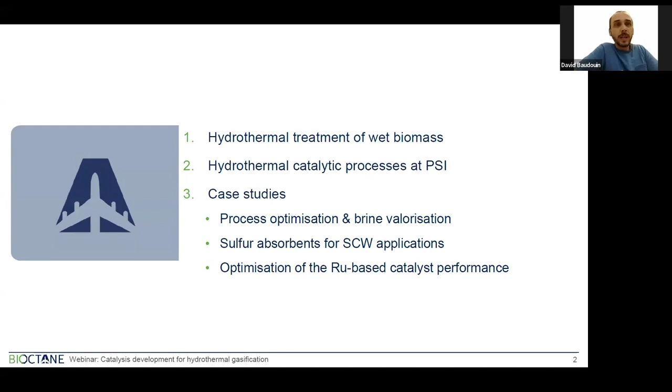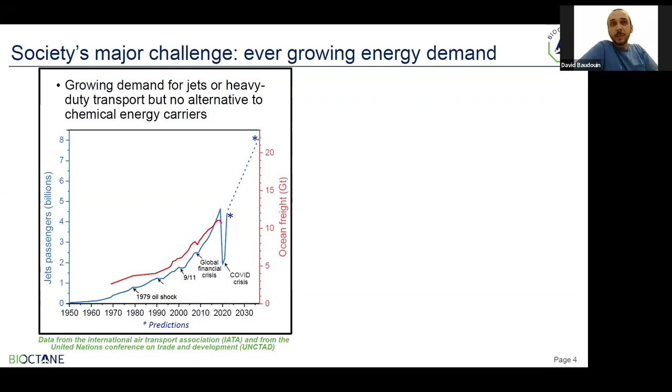You all know that we have a growing demand on jet fuels and heavy-duty transport fuels, also marine and trucks. Despite the COVID crisis, this is expected to keep growing, despite the limitation now in fossil fuel resources and liquid fossil fuel resources.

So the big question is, how are we going to overcome this limitation in liquid fuel resources? If we want to fly, flying with batteries is hardly an option, particularly for long distances.

One alternative, not a solution to everything but one brick in the bridge we have to build, is to use these huge amounts of wet biomass, wet wastes that are available and underused. The big problem to overcome is the low efficiency when one wants to burn biomass that contains water. Obviously efficiency goes down as the water amount increases, and when you reach about 60 to 70% water, typically you waste all the energy contained in the feedstock to evaporate the water.

Taking as an example one very good case of wet biomass that's available and underused nowadays is sewage sludge. Here is a typical best-case scenario of usage: after some pre-screening, separation and sedimentation, you would apply anaerobic digestion to produce biogas from the sewage sludge, and the digestate produced would then be dehydrated in order to be, for instance, incinerated or used in landfills when that's available and possible.

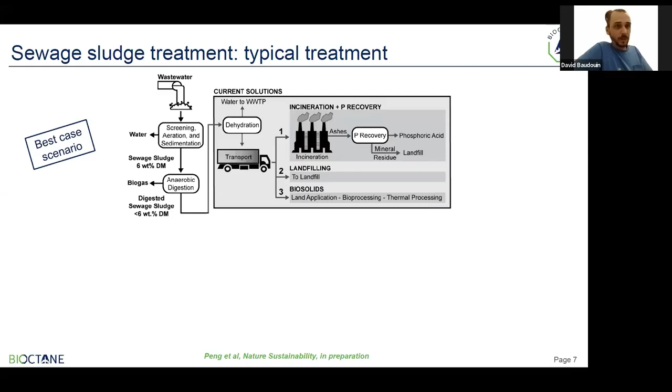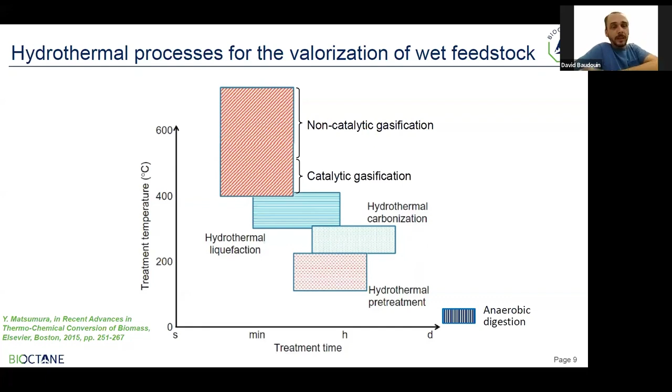So when we apply, for instance, hydrothermal gasification to a sewage sludge treatment plant, there are two approaches: either you perform gasification from the raw sewage sludge before it's treated in the wastewater treatment plant, or it can also be applied on the digestate itself to further convert the organics present in that stream.

The very big advantage of this, which I will explain in a few minutes, is that hydrothermal gasification particularly allows, on one side, production of gas, biogas, and on the other side, it allows the recovery of phosphorus and other nutrients.

One thing to outline is that in Switzerland, for instance, by 2026, most of the phosphorus should be recovered from sewage sludge, and this brings some challenges for wastewater treatment plants in the country. Other countries are following, like Germany.

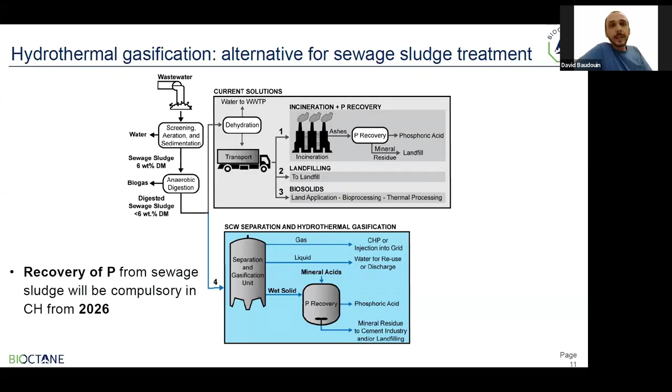This, of course, can bring a lot of trouble, as these salts, if they precipitate on the walls of a continuous process, can clog the process, but they could also deposit on catalysts, which would also lead to trouble in a catalytic step of a process.

This would be the case for some salts, not all of them, fortunately. Examples would be sulfates, potassium or sodium sulfates, sodium carbonate, and sodium phosphate also. These salts precipitate and are classified as type 2 salts.

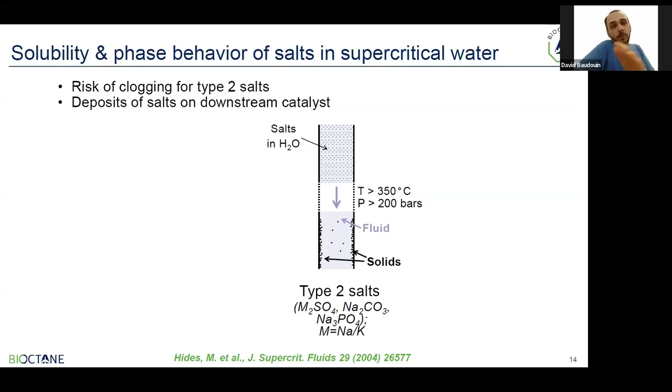Now, there is another category of salts called type 1, which do not precipitate but form another phase instead, which is liquid, a brine. It just forms a liquid-like, not technically liquid but liquid-like, brine very rich in salts, leaving another liquid-like fluid which is salt-free or salt-depleted.

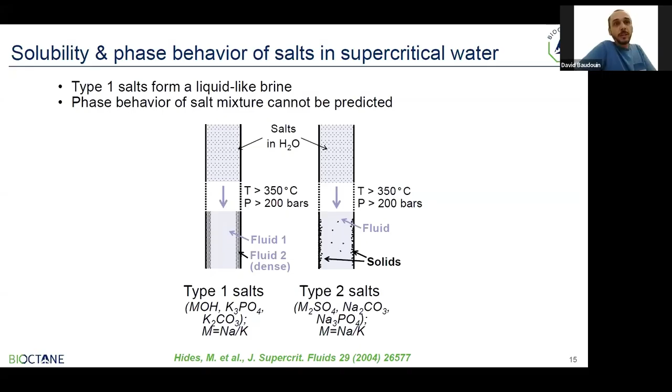This is actually an advantage because we can use this property to separate the salts from the main stream, which has the advantage of protecting the catalyst from clogging.

Catalysts that will be downstream of this separation step. Here I show you, on the left, a very schematic scheme of a separation vessel that was designed at PSI, and on the right, a more technical one.

The concept here is that the feed is fed in from the bottom, and as the feed goes up in the separation vessel, the temperature rises very quickly. Once reaching the critical point, saturation point, the salts will separate and precipitate or form a liquid brine that falls to the bottom of the vessel by gravity, where they can be extracted continuously or semi-continuously. At the top of the vessel, the main stream comes out salt-depleted.

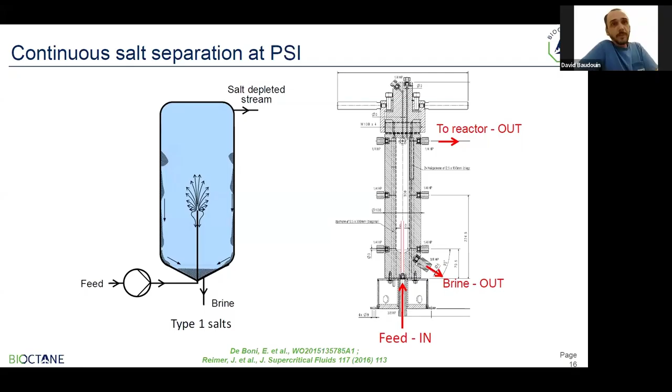Something should have appeared in the former one, that doesn't matter. So here I show you...

The typical concentration or yield of gases at a set pressure, as indicated at the bottom, as a function of temperature. You can see that methane and CO2 dominate below 450 degrees C, and hydrogen and CO start to increase significantly when the temperature goes up above 500, 600 degrees C.

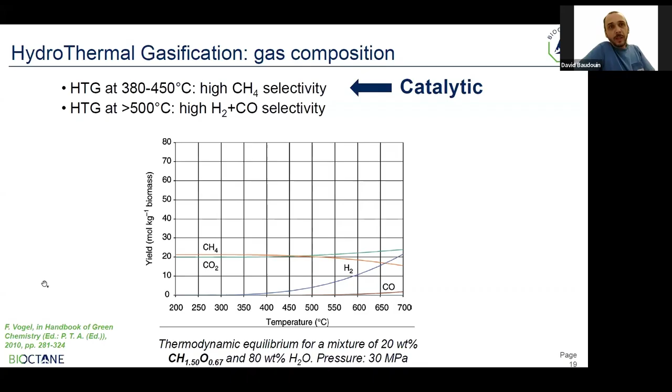These, of course, are for a set concentration of a hypothetical composition of feedstock. These can vary, but the trend is at high temperature, hydrogen is favored, while at lower temperature, methane is favored. If you go to the next slides, I'm outlining that the lower temperature step involves the use of a catalyst, otherwise the reaction is not fast enough for a proper industrial process.

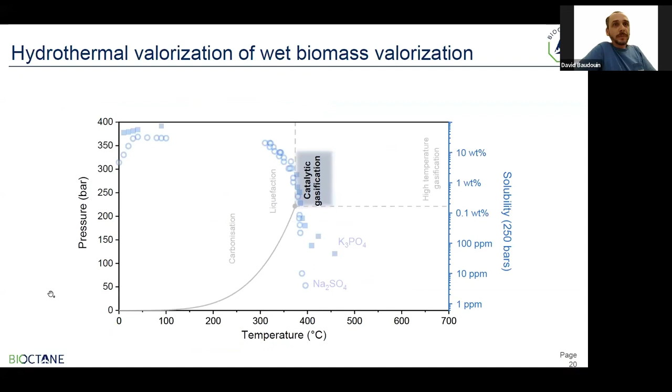So the advantage of using lower temperature with regard to higher is where we can still exploit the low solubility of the salts because we are above the critical point of water. We have the advantage to be selective toward methane, which depending on the objective, can be an advantage. It's easier to compress.

Methane has this advantage above hydrogen: it's cheaper to compress. Also, it's a reasonable investment cost, as the temperature being much lower in terms of material needed to sustain the temperature, this is much cheaper for investing in an industrial plant.

Another advantage is that the catalytic gasification can convert all the organic matter in the stream that the catalyst is exposed to, which means that all organic pollutants can be removed. Another advantage, as opposed to the higher temperature one.

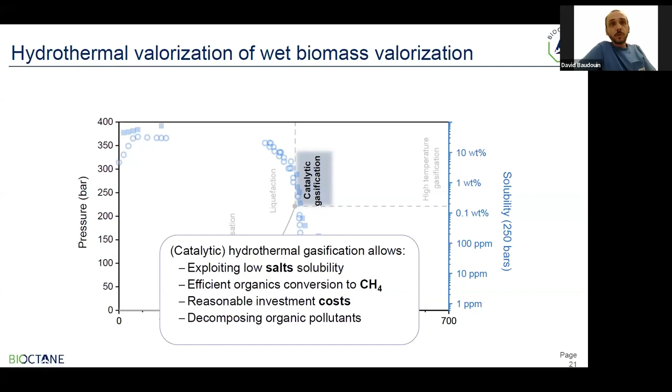Next slide, please. So here I just give you... I see this is the wrong side, so you can move to the next slide. No, sorry, come back to the former slide.

So this is just a slide introducing you to BIOCTANE and how the hydrothermal gasification connects to the project. The aim of BIOCTANE is to produce jet fuels using, as you see in the blue boxes there, some biological approaches to convert various feedstock into butanediol or acetoin that can be further catalytically converted into jet fuels.

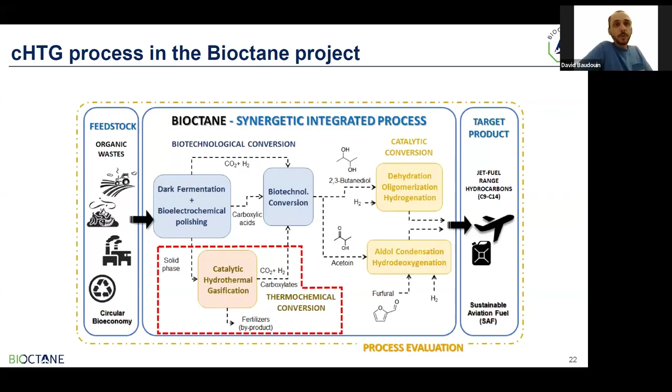Hydrothermal gasification enters in valorizing and optimizing the waste stream from the biological steps, further converting the organic matter in the waste stream into hydrogen selectively, and hopefully also carboxylates. On the side, we can also produce fertilizer, as fertilizers are mostly extracted into the brine that is obtained from the salt separator that I introduced earlier.

So, in the BIOCTANE project, our aim is to produce hydrogen selectively. And if you followed properly, you've seen that at lower temperature, methane is favored. So that's the challenge that we have in the project. Of course, methane will be thermodynamically favored.

Now, kinetically, we can still favor hydrogen over methane. There, we have to promote some reactions versus others, so kinetically favor these before methane actually has time to form.

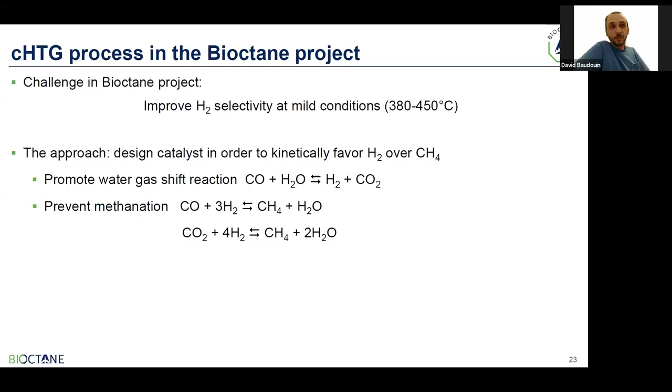This is the whole point of the project: catalyst design, so that we can favor some reactions and disfavor others. In the rest of the presentation, I will not enter into details regarding the progress on this project specifically, as it's yet too early to give too much information. But we'll give you a lot of other information directly connected to the progress and the challenges of the project.

On the other outlet of this step is the desalinated stream. In the brine, the salts are concentrated, highly concentrated. And if you move to the next slide, the advantage is we can concentrate phosphorus and potassium into this stream. There's a big advantage for phosphorus particularly, as the reserves are not infinite, and we're exploiting it worldwide at the moment like it was an unlimited resource, but that's not the case.

So the next steps of the process would be, before the catalytic conversion, we have a sulfur scavenger to protect the catalyst from sulfur contained in biomass. Then the desalinated and desulfurized stream enters the catalytic reactor, where all the organics present in the stream are converted into biogas. And that leaves very clean processed water, organic-free processed water.

So a first word on the catalyst, I will get into much more details in the coming slides. Ruthenium is the main metal studied in this reaction, as it's by far the most stable and the most active. Carbon is also by far the most stable and highest surface area support that can be used under these conditions.

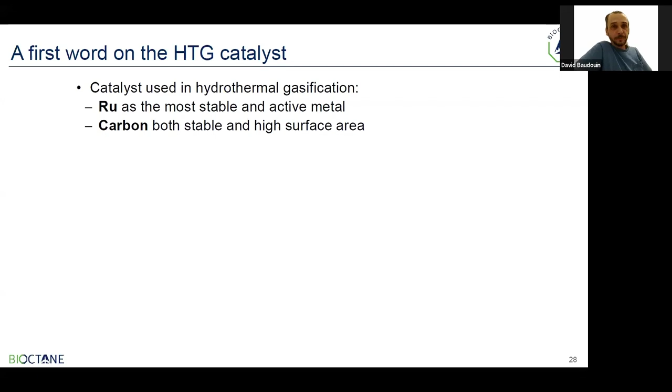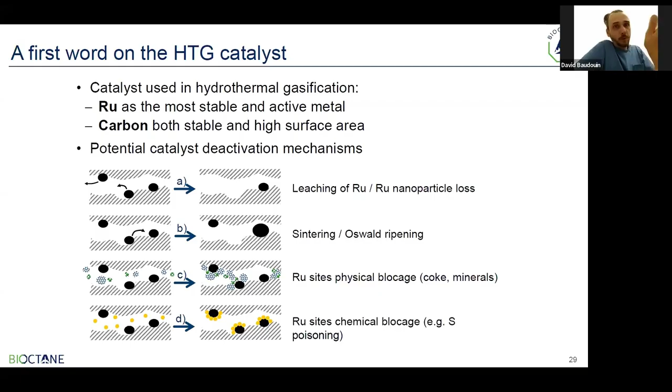Here I list the main deactivation mechanisms that the catalyst under these conditions can suffer from. You find lots of similarities with gas phase catalysis in other applications. You have leaching of ruthenium, or loss of ruthenium through debris of catalyst being flushed away from the bed. You have sintering, Ostwald ripening, different mechanisms leading to loss of surface area of the metal. You have physical blockage of the metal, and of course poisoning of the active metal by sulfur or other elements.

The advantage, from a process point of view, and that's why these two steps before the catalyst step were developed and optimized, is to prevent the catalyst from being exposed to salt deposition, so from clogging. The salt separator is there to remove salts and solids that could deposit on the catalyst bed. The next step, the sulfur scavenging, is very important, as biomass can contain a lot of sulfur and a very broad variety of sulfur compounds. So the sulfur scavenger is a key aspect of the process.

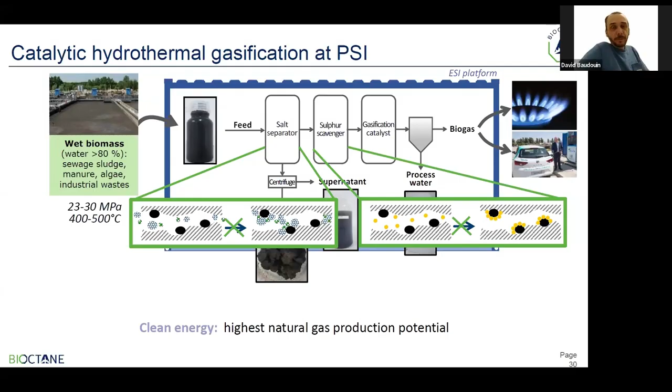One aspect you've seen earlier is that methane is produced in large amounts, but also CO2 alongside. So one approach that can be followed is to co-feed hydrogen with wet biomass into the process.

This was done in the group. We co-fed — at the moment we have only done it with model feedstock, so glycerol in this case. Together with glycerol, hydrogen was pumped in along the feed at high pressure.

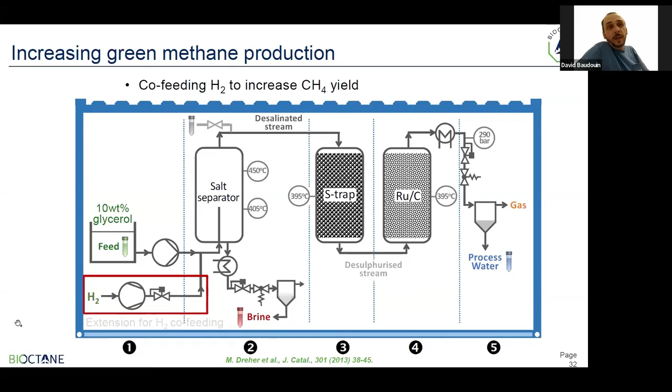So that is a very good approach in order to do a power-to-gas process, in the scenario where hydrogen is produced through renewable resources. Instead of storing and compressing hydrogen, which is expensive, it can be used directly. Instead of storing hydrogen, which presents some cost, it can be directly used and converted into methane, which can then be used in the infrastructure that already exists in most countries.

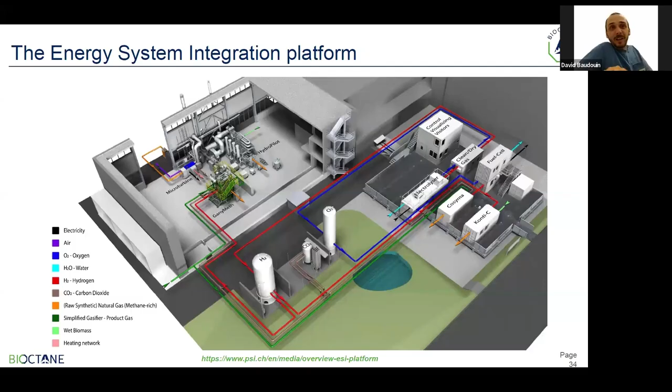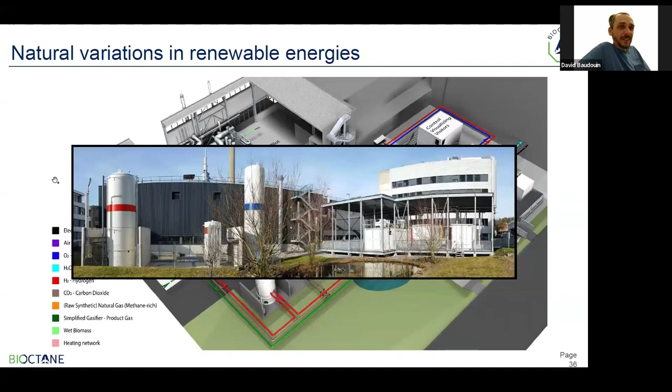So we have the hydrothermal gasification process integrated also into this platform through small-scale units. This is a photo of the platform. These are the two units that we have on the platform.

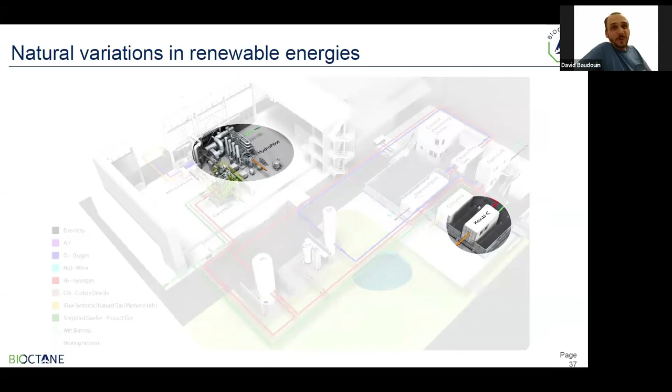So in these two platforms, we have different TRL, technology readiness level. We operate at 2 to 4 on one unit, and the other one, which is a pilot plant, we work at 5 to 6.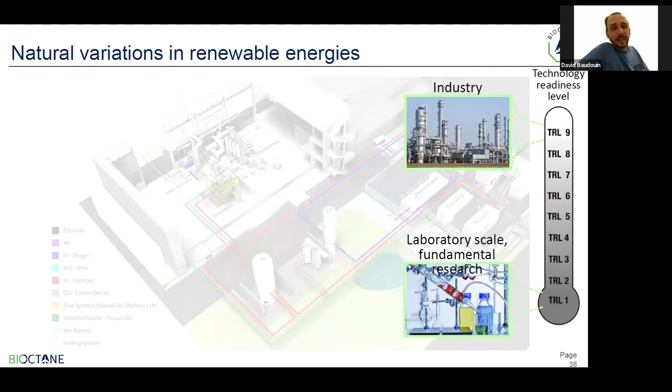This is the small unit that we will also be using for BIOCTANE. It's used for research purposes, and we operate at 1 kilogram per hour.

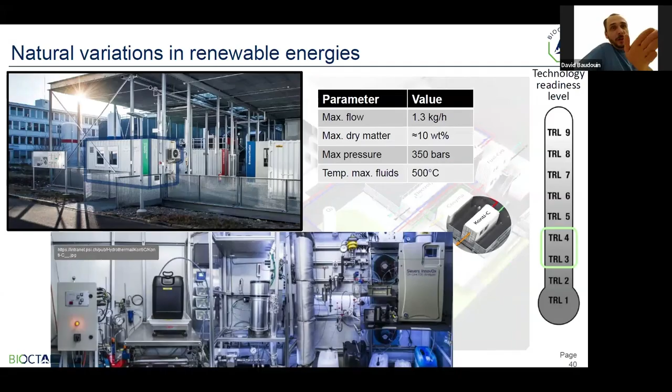This is the view of the pilot plant unit that was commissioned a few years ago, and this one can operate at 100 kilogram per hour. The catalyst bed on this platform is about 20 kilograms, so it's much bigger than the smaller scale one, which is about half a kilo.

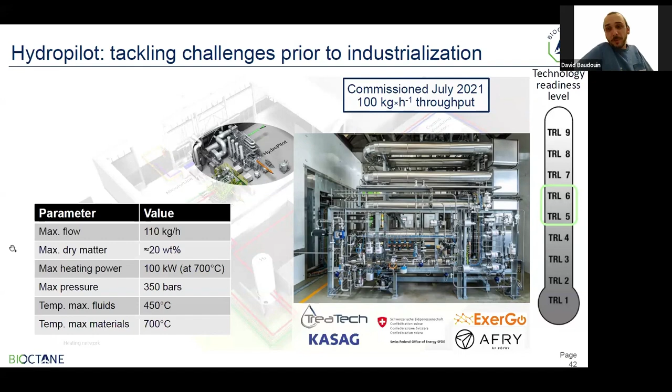I will move to the next one to save a bit of time. Okay, so now we go to case studies.

I've shown you already this slide. I will first give you some information about this step, the salt separation. This small case study was part of another European project called HyFlexFuel. It had similarities to BIOCTANE, where we also had to produce jet fuels from different biomasses.

In this case, the project was using hydrothermal liquefaction to convert the biomass into jet fuels, and hydrothermal gasification was doing the valorization of the waste stream, also aqueous phase, in order to produce more gas and to recover the nutrients.

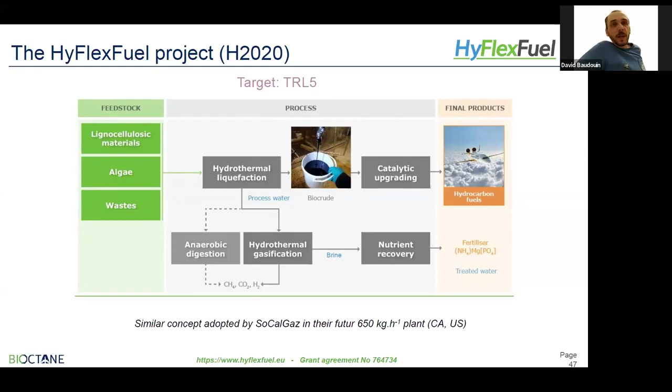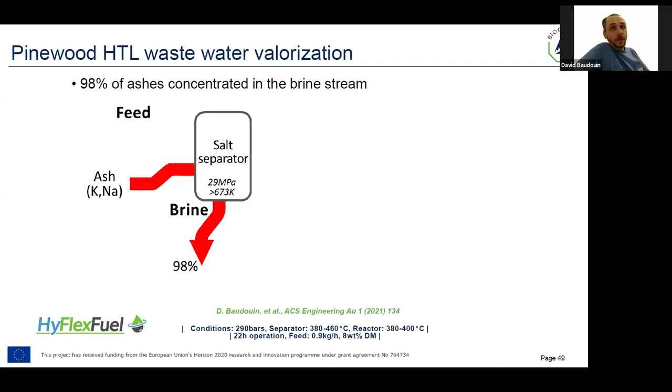In the salt separation in this project, we were able to, at least with some of the streams tested, have a very good recovery of the salt - extraction of the salts. You can see the mass balance was very high, up to 98%.

While the carbon, on the other hand, the efficiency was lower. Of course the aim was to have 100% of the carbon fed in found in the synthetic natural gas produced. However, we have close to 50% loss in the salt separator.

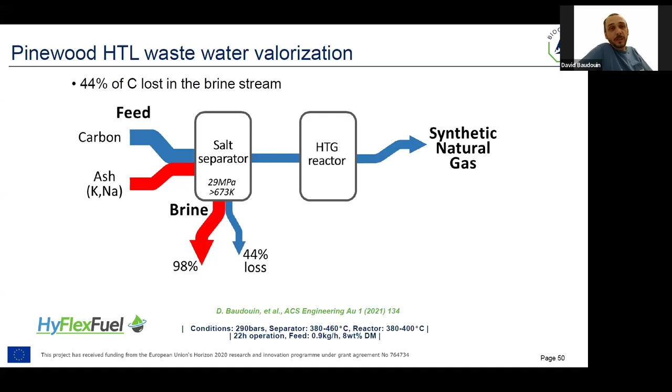To make a very long story short, we performed a deep investigation and quantified the carbon present in the brine - up to 3/4 was composed of carboxylates, and probably more of it was also organics, not identified.

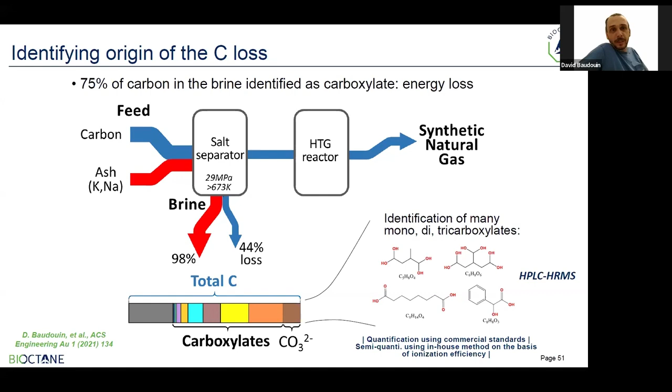We were able to optimize the process by simply increasing the temperature in the salt separator to favor decarboxylation of these organic compounds, which will lead to more CO2, but more organic matter that will not be separated along with the brine, and will end up in the catalytic reactor to be further converted into gas.

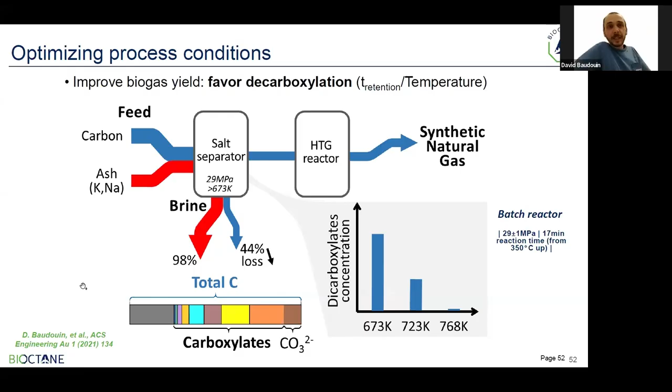I will skip this one. Okay, so now we move to sulfur absorbents, which is directly connected to the catalyst development in this context.

Sulfur can be present in large amounts in biomass in very different types of compounds. There are some simple ones, H2S being the main, the most obvious one, but also COS, CS2, and a lot of organosulfur compounds, a very broad variety of them. Our process has to deal with all of them, and of course there are sulfates present.

The salt separator will allow removing most of the sulfate - a good thing. Some other organosulfur compounds that are charged or ionic, but there's still a big amount of them that can reach the sulfur trap. In order to optimize the trap and its catalytic potential, we need to first identify them to better convert them and trap the sulfur.

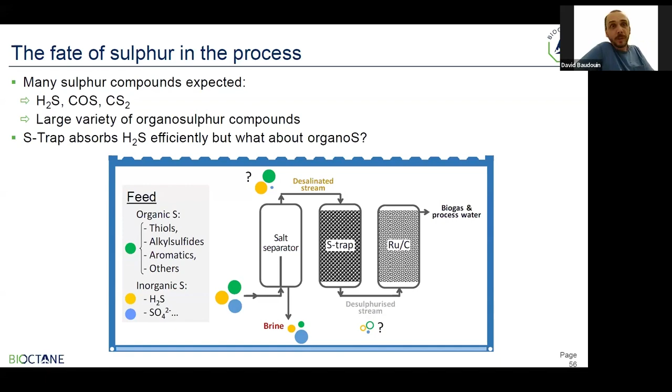So we put a good deal of effort into analyzing, identifying and quantifying the different compounds present in the stream entering the sulfur trap bed, and also the ones not being trapped and not being converted, entering the catalyst bed.

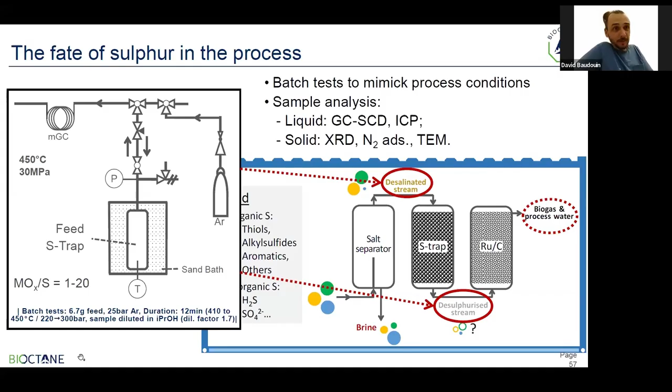To do that, we did batch tests to mimic the conditions observed in the continuous test, and also continuous tests to confirm the batch test was representative. This allowed us to identify many compounds, restricted to a few family classes of compounds: small thiols, dialkyl sulfides, dialkyl trisulfides, and various thiophenes.

So these organosulfur compounds - unfortunately we could only identify the volatile organosulfur compounds, which is already a large amount of work, but it only represents a quarter of the organosulfur compounds present in the feedstocks that we studied.

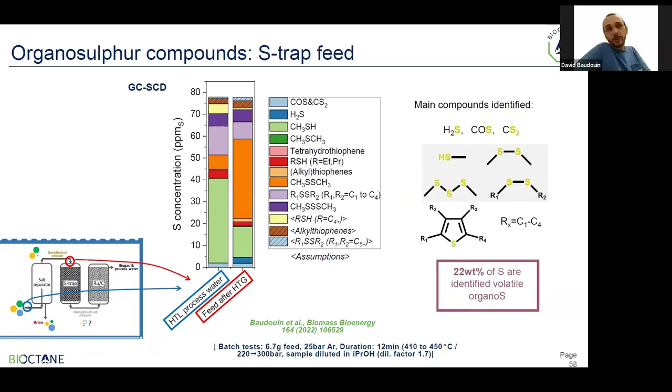Before moving into sulfur traps or materials that have some catalytic activity in desulfurizing organics, I want to dive into the big challenges of the supercritical water condition.

Catalysis in the gas phase is very well established and known, with many supports that are stable and well understood. However, many of these materials are not stable in supercritical or reducing supercritical water conditions. This table summarizes the problem we often face: many materials well known in catalysis are just not usable in supercritical water condition. We are restricted to carbon, titanium oxide, some phases of titanium oxide, zirconium oxide, and a few new materials identified recently in our group and others.

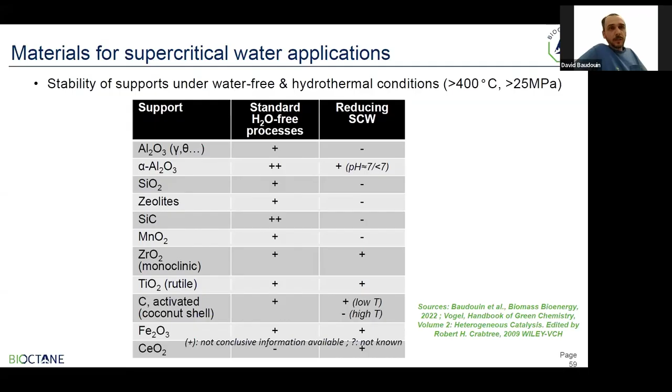It's very restricted. You also find in other, more theoretical studies, information on the solubility and stability of materials. You can see that many metals are not that stable under supercritical water conditions, with nickel and cobalt having solubility issues in some conditions. This adds extra complication to designing and identifying a catalyst for specific applications, restricting the field of application.

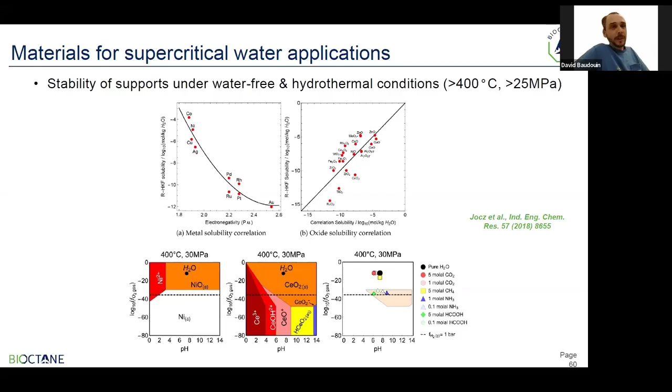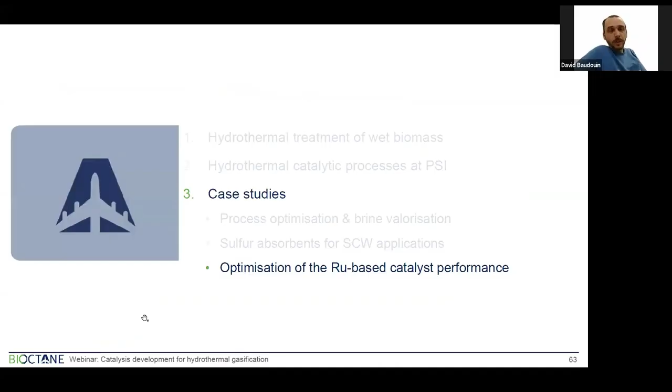Now we move away from sulfur, to focus on ruthenium-based catalysts.

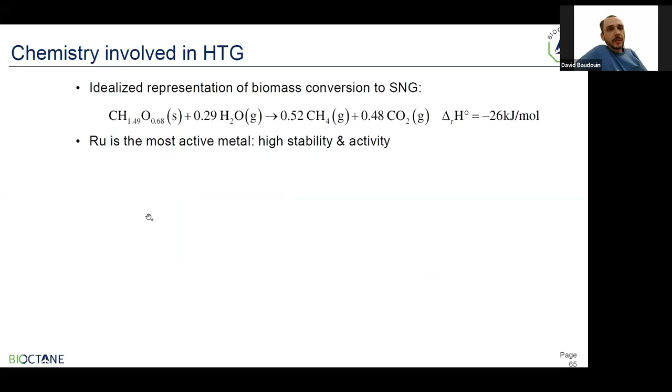I already mentioned that ruthenium is the most active metal under these conditions. The big question is what is the active phase in this catalyst. Ruthenium is exposed to reductive conditions with a large excess of water, so for a long time the active phase was believed to be ruthenium oxide. It turned out, by doing in situ X-ray absorption spectroscopy, that there is direct proof ruthenium gets reduced very easily, as early as 150 degrees C, reduced to ruthenium zero. This was direct proof that ruthenium zero is actually the active phase under these conditions.

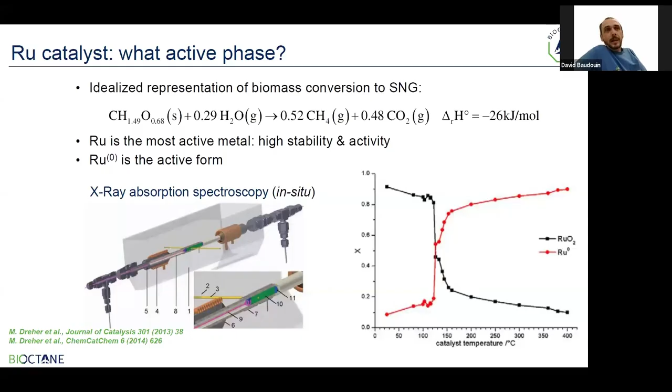In the rest of the presentation I will focus on ruthenium supported on carbon nanofibers. Often activated carbon is used because it's much cheaper and has high surface area, but unfortunately activated carbon is mostly micropores, which are completely useless under these conditions because they get filled very easily, and ruthenium is mostly not present in the micropores but in the mesopores of activated carbon. So carbon nanofiber is used in most of our scientific studies in order to largely simplify the study of the catalyst, of the spent catalyst.

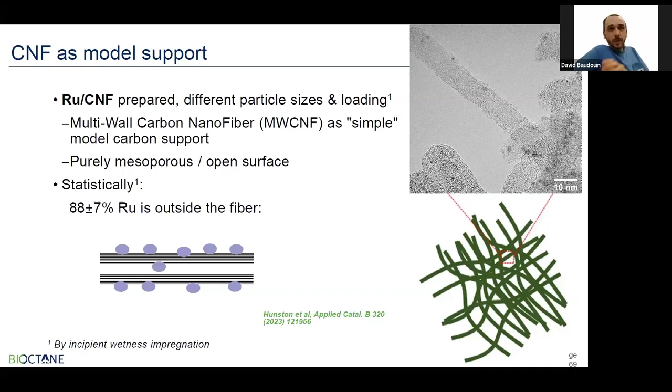We studied the catalyst on a small lab setup, a continuous setup with a fixed bed reactor filled with ruthenium on carbon nanofiber. The gas is analyzed online, and the process water is analyzed for the remaining unconverted organic compounds.

Here you find typical results obtained from tests done on this lab scale setup. We find the gas composition and the gasification efficiency, the quantity of carbon found in the gas phase with regard to the amount of organics fed in, and also the conversion of the organics present in the feedstock.

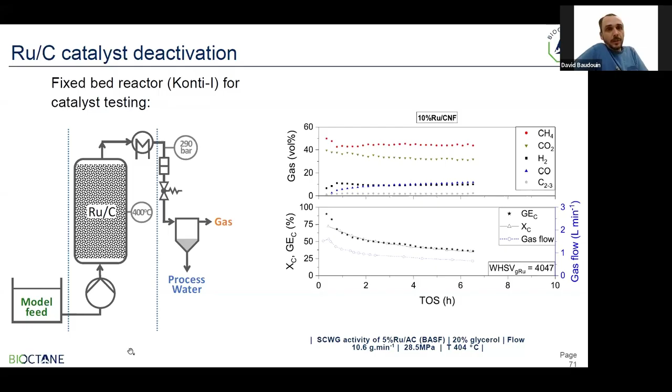Okay, one study that we did was to look at the effect of particle size on the catalyst performance under these conditions. This has been an open question for quite some time, and here I report a long study into just a few slides, a few graphs.

Using many tests that we did on the setup I introduced before, we came up with this graph, which represents the turnover frequency of the catalyst - the initial one, at least at the first 30 minutes, as a function of the initial particle size. You can see there is no clear particle size effect unless you go close to 1 nanometer size, where the activity seems to increase dramatically.

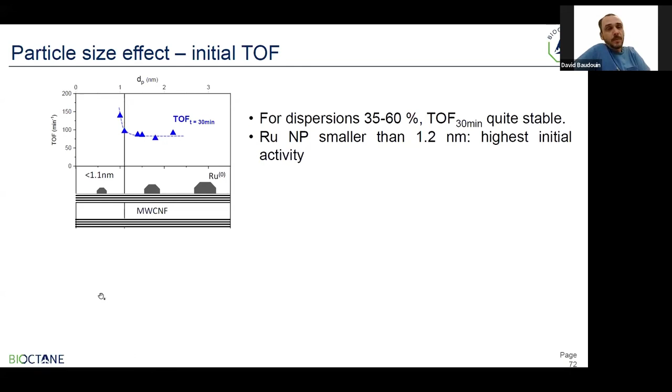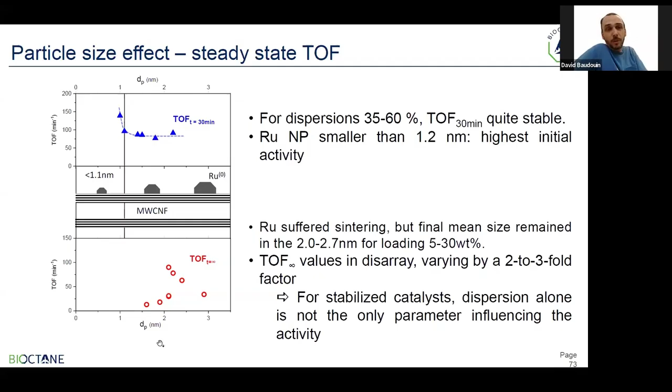Now, the catalysts suffer from deactivation, or very early deactivation, and then the catalyst finds some stable activity. Here is reported in red, the turnover frequency after stabilization. This, of course, is updated with the dispersion of the metal after the test. You can see that there is no much correlation observable anymore, with particles at 2 nanometers having very different turnover frequency.

Now it turned out that we observed some signs that the loading had some effect on the performance of the catalyst, and we are further investigating that. By plotting the turnover frequency with regard to the surface loading of ruthenium, we find the same correlation for the initial turnover frequency, but we also find some correlation that makes sense with the stabilized turnover frequency. It seems there is an optimal surface loading of ruthenium that was found for CNF, but also for activated carbon.

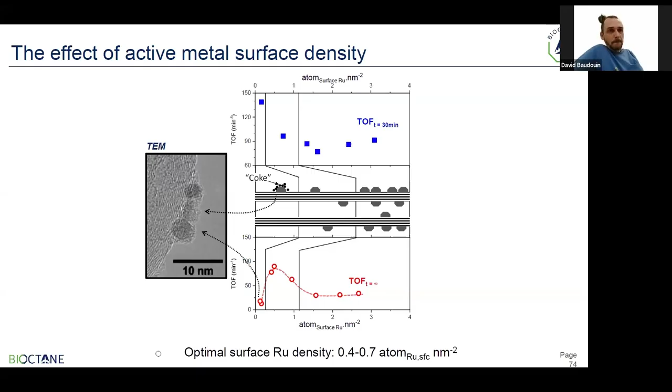So this raises the question of what this is caused by. There are indications that the surface plays a role also in the activation, and the clean, free surface that is free of ruthenium particles might play a role in the activation of the catalyst. This is something we have, and by this I mean the deposition of coke, which we have further investigated.

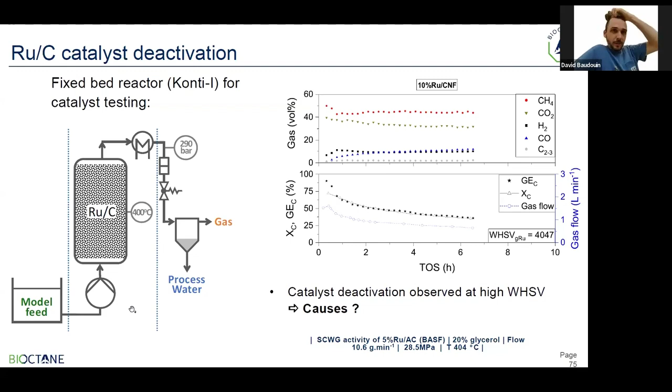So I'll come back to the slide you've seen before, the different mechanisms that can explain the deactivation. Before moving to the question of coking, I'll give you a few hints regarding leaching - the loss of active metal from our catalyst bed.

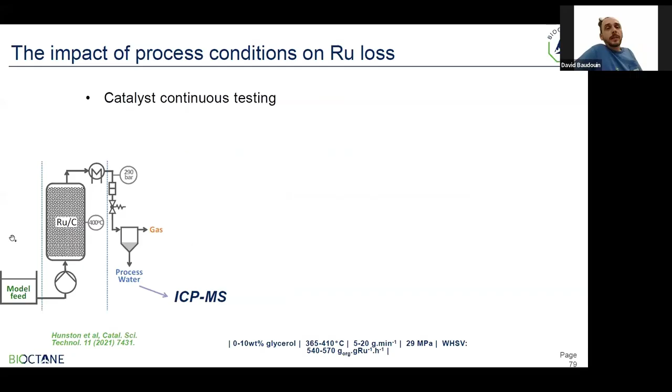So we use the same setup that I introduced before. We used ICP-MS, not OES, since MS is much more sensitive than the OES detector. We were able to test the loss and leaching of metal from the fixed bed at different conditions - different temperatures, different feed concentrations - because we know that feed concentration has a big impact also on leaching of some metals.

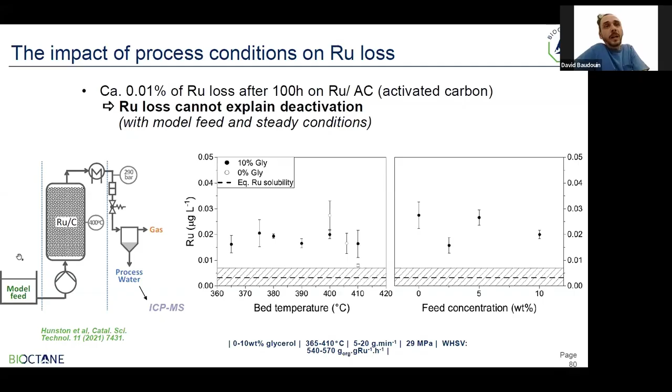We observed that there was no big difference, no effect of these conditions, at least the ones we applied, on leaching, which remained extremely small. You can see the units here - we are talking about micrograms per liter of ruthenium - and this is close to the thermodynamic value calculated that can be found in the literature.

So that was a conclusion. We identified conditions that should not be applied - a process condition that should not be reached - in order to avoid damage of the catalyst beds, particularly at large scale.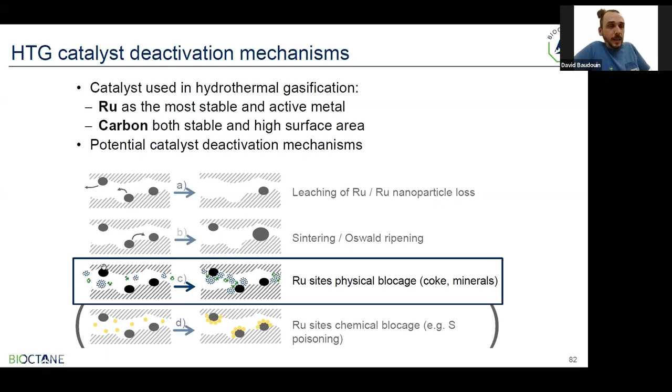So I'm now moving to the coke that I mentioned earlier. This is the deactivation due to carbon deposition or coke deposition. So first, what is coke?

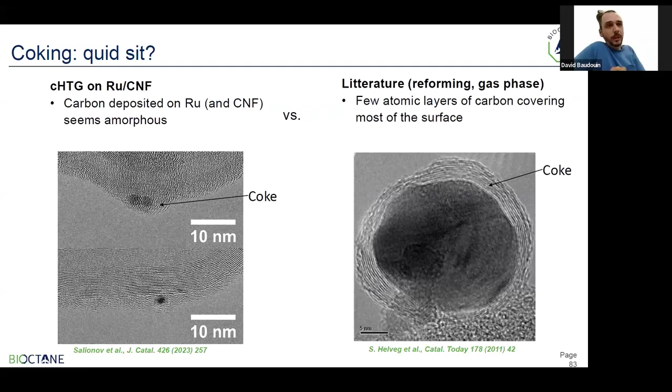So moving back to the setup I presented earlier, we performed different tests at different conditions. We performed tests at thermodynamic conditions, so full conversion of the feedstock, and also in the kinetic regime, below 20% of the thermodynamic regime, as well as some intermediate conditions.

We collected the spent catalyst and extracted the organic matter that deposited on the catalyst bed. This extraction was done with a mix of solvents very efficient at dissolving heavy carbons, particularly aromatic carbons. These extracts were analyzed by HPLC HRMS.

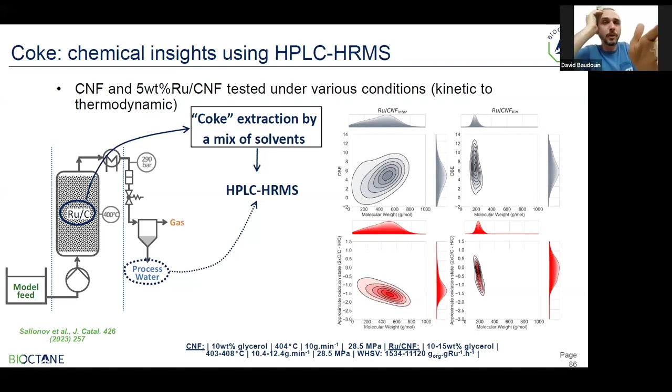Again, making a long story short, we were able to identify a mechanism, a reaction pathway, that yields the formation of aromatics that deposit on the catalyst. We identified aldol condensation, steps 2 to 3, and a Diels-Alder reaction, step 4 to 5, as the core steps that yield aromatics and polyaromatics.

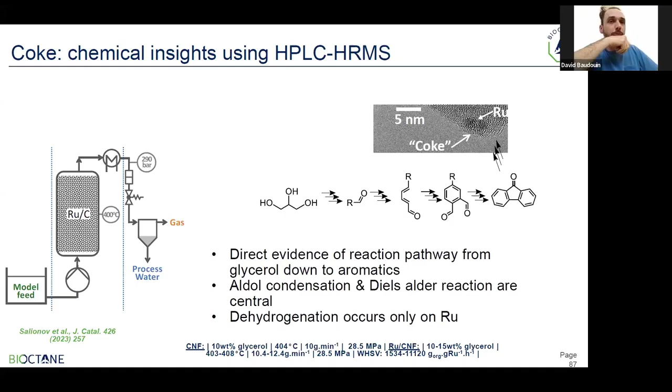You have a good example on the right of one compound present in high concentration, which is a starting point for formation of larger polycyclic aromatics. It's important to stress that dehydrogenation occurs only on ruthenium, and was not observed on the support itself.

I'm coming to an end. In short, I hope I've convinced you of the good and nice potential of hydrothermal processes in general, and gasification in particular. But I've also outlined some challenges faced with regard to developing catalysts in this field.

Ruthenium on carbon is a star when it comes to the production of methane. When it comes to production of H2, there will be a lot published in the coming years from us, hopefully, for the selective production of hydrogen. We have to shift away from ruthenium, which is too selective towards methane. Some of the strategies we follow are selectively poisoning or doping it, and using different new supports.